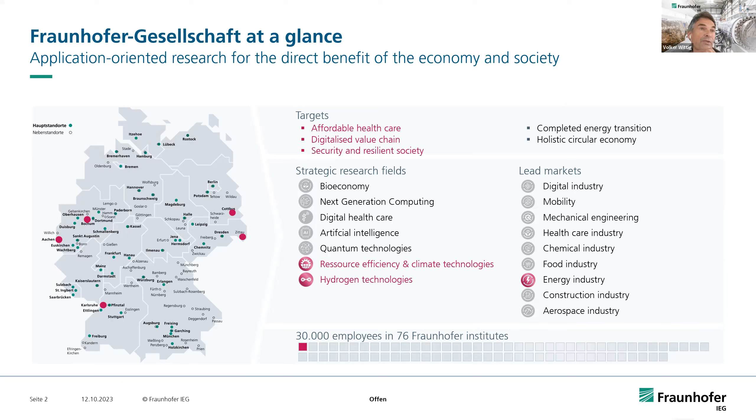We were founded here in Bochum, in this institute, 3 years ago, changing over from the Geothermal Center into Fraunhofer IEG, as it's called. This is our institute now. We are well over 200 employees already, with 2 directors, and very much present in the west here in the Bochum-Aachen area, also in the east, Zittau and Cottbus area connected to the Hochschule Brandenburg. We are also now setting up a center in the south in Holzkirchen, especially for application in southern Germany in the Molasse Basin.

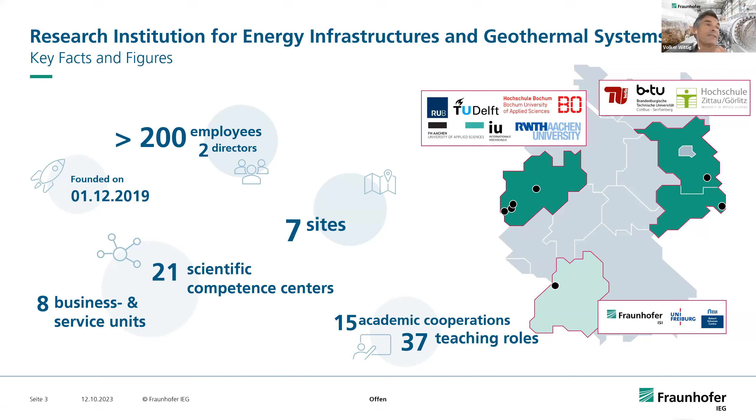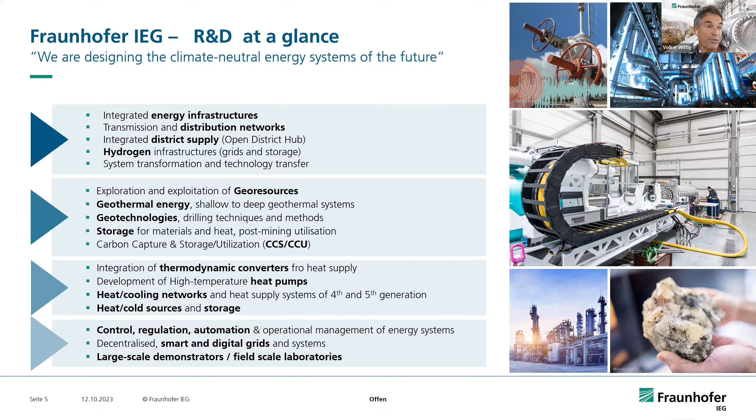A little bit more of a look inside our Fraunhofer area now. This is what we do within Fraunhofer IEG, the Institution for Energy Infrastructures and Geothermal Systems. What we did in the past was centered in this block, the Geothermal Center, working a lot on geothermal energy, geotechnologies, and geothermal resources. Now within Fraunhofer IEG, we've expanded our envelope quite a bit into hydrogen work, energy infrastructures overall, thermodynamic converters including heat pumps, heating and cooling networks, and also smart and digital grids, controlling energy, regulations, and automation. So the part that used to be the focus of our institute has become quite a bit larger, as you see in this picture of the inside part of all that. We added a lot more stuff and know-how within the institute.

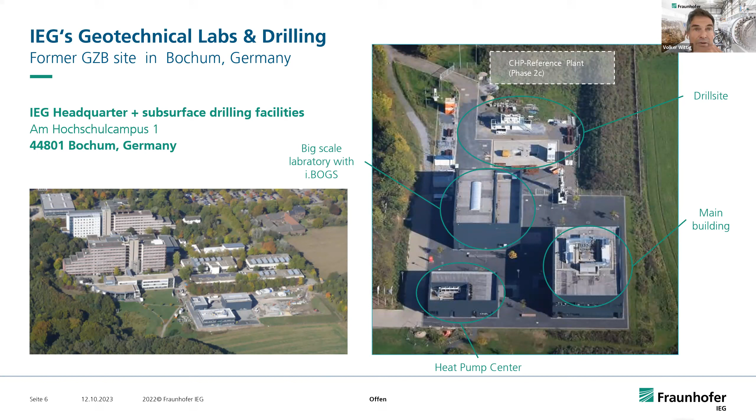And this is where we are in Bochum, our Bochum campus, which we built up about 10 years ago. We managed to set it up with our own geothermal system. Back here is our drill and test site, and this is where the headquarters for the IEG is, where I'm sitting in this building. This is very much our downhole, drilling lab and development area here in Bochum, as it was before. It remained all here.

Within our group, Advanced Drilling Technologies, we have 3 drilling groups now within Fraunhofer. One is the applied drilling group, running our rig and drilling actual holes.

And then we also have one group now that is more drilling engineering and planning for deep wells, people that have been in oil and gas before. And then my group is still very much focused on developing new drilling tools, new ways to break rock. You see here our main research points. Today we will talk very much about percussion drilling and also acoustic-based drilling control, and artificial intelligence / neural networks becoming a big one for our downhole monitoring processes that we are developing.

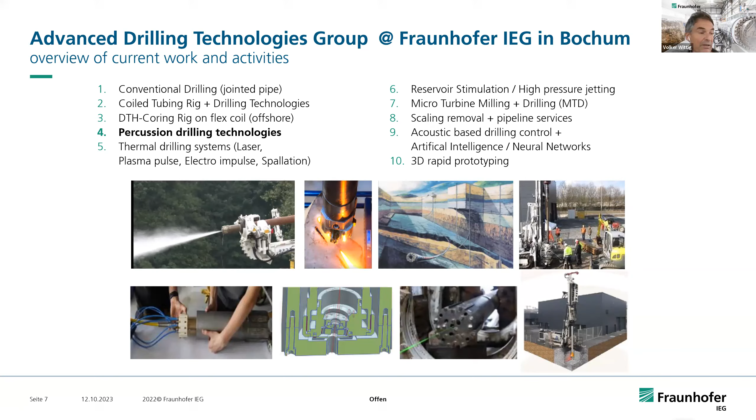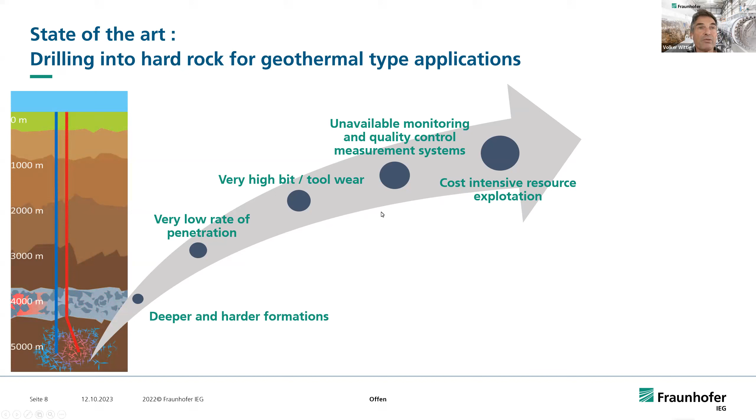So why do we need new drilling technology or look to develop it better? Most of you know it. We have still low rate of penetration, could be a lot better. We have to drill harder and deeper. Typically for geothermal, the tool wear is high, and also the monitoring systems are not that good. So it all makes for not so cheap drilling, so to speak. And this is why we still work and try to develop better fit-for-purpose drilling technology.

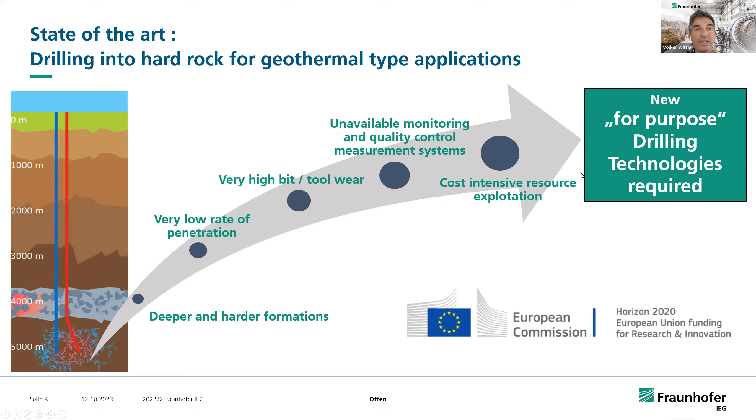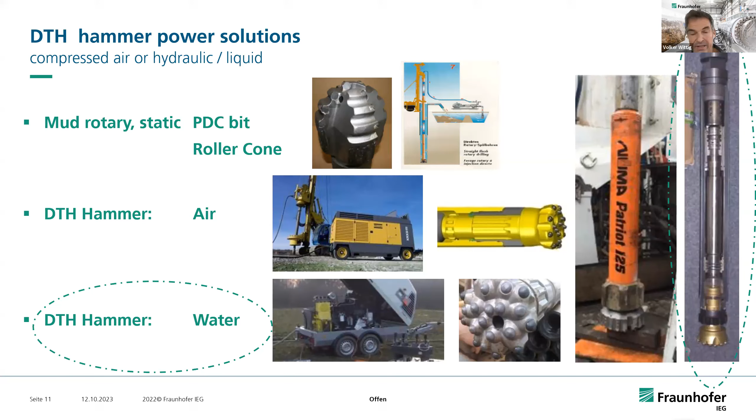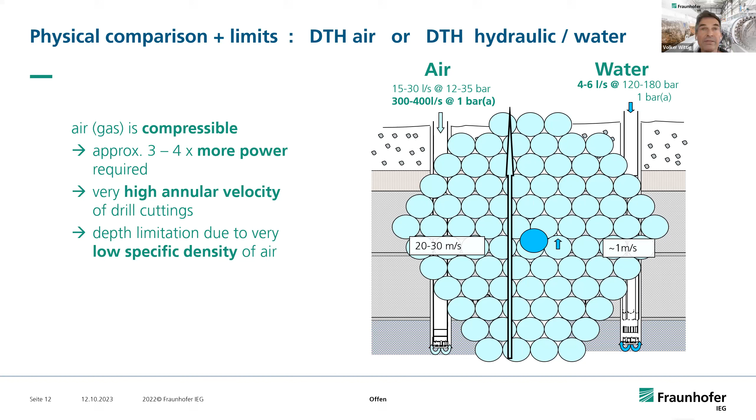That's why for deep drilling, we are after hydraulic or liquid-powered water hammers. Gas is compressible and much lighter than water or other reservoir fluids. That's why the depth capabilities are already limited for air hammers. Plus, we have very high expansion rates. And for cutting transport, we also have issues with air hammers - bringing up high speeds in the annular area, or we have problems getting the cuttings out properly. So those are all factors where air hammers are limited in where we can use them and to what depth.

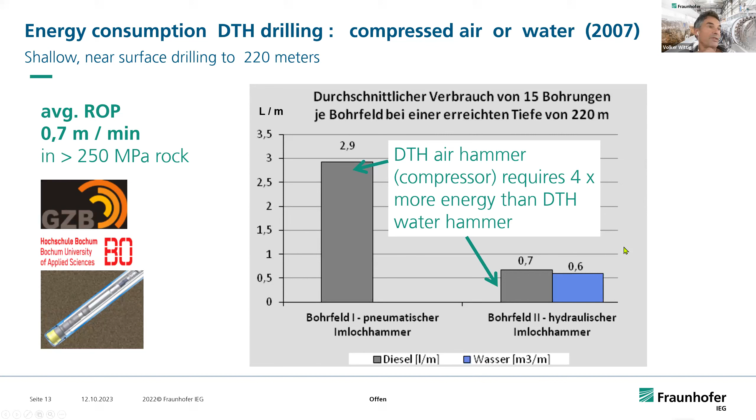That was just trying to measure out the energy and fuel consumption. This is becoming rather important now in the drilling business - how much energy do I need to drill a hole? And that's where the air hammers are not so good on that side. But on the other hand, they only need air, no extra fluids. If you have air available, it's good - it may become a problem otherwise.

We have been drilling holes with water hammers also for, I could say, 20 years now. This is our project site in Bochum, where we drilled holes for our campus here for the geothermal power supply. We used water hammer technology because we wanted to investigate it and become more familiar with it ourselves, even though probably PDC drilling would have been quite adequate. So we drilled together with Wassara, with a Wassara 6-inch hammer, tried some recirculation out that you see here with a sedimentation unit. We had another unit attached to it to try to come up with at least a system where we could recirculate some of the water to make drilling possible for deeper projects.

Still again, hammer drilling was quite good because we came up with high ROPs, up to 1 meter a minute in that type of sedimentary rock we have here. So that was quite good, and that was another first step in the direction of water fluid hammer drilling.

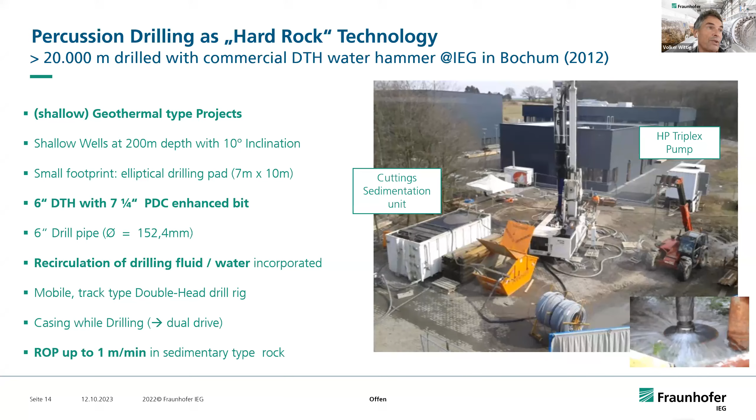So it was quite fast and good drilling, and Hanjin also tried some recirculation and some better cutting lift systems using compressed air within that system.

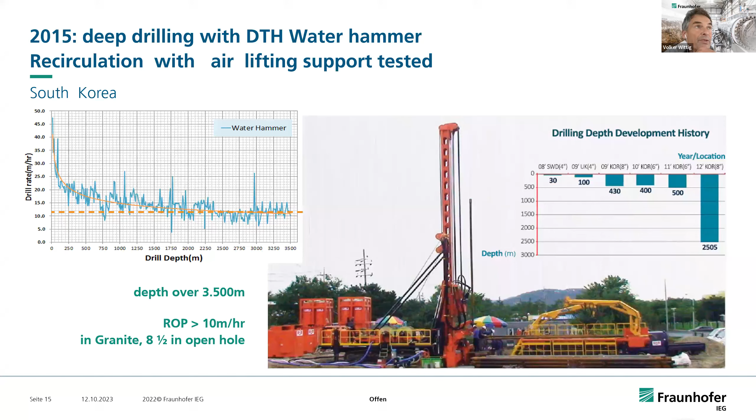Then another few years down the road, we were in Finland with ST1, and the company Anger drilled a deep hole there for ST1 for geothermal use. The first top section down to roughly 4.5 kilometers was drilled with air hammers, just using air and some foam probably at times. And it worked quite well, amazingly well.

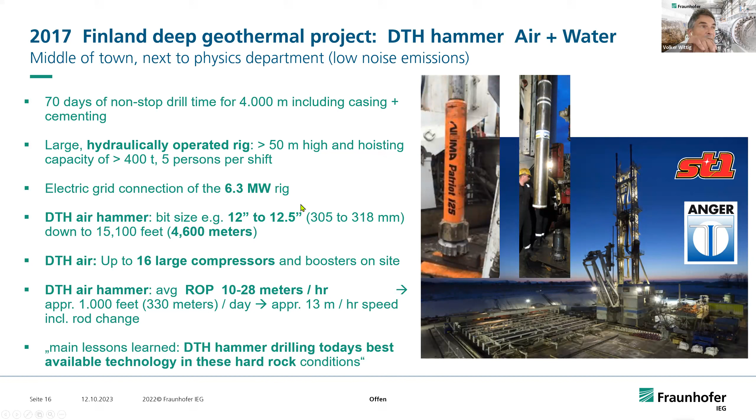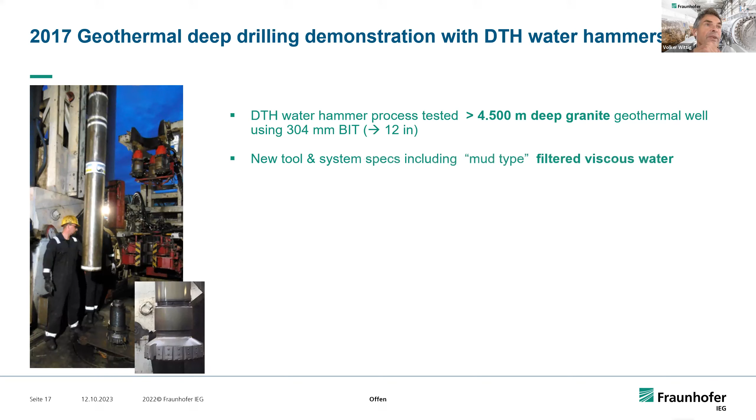Then the program was planning on continuing with fluid hammers, because hydraulic hammers are not that depth dependent. They can be used to about any depth. So within the same project, some prototype percussion hammers were tried out to be run beyond 4.5 kilometer depth. And as mud type fluids, viscous water was used. So not just clean water, but some light viscous water to help for cutting transport.

The hammers that were used, they had a few different kinds. One was from Australia, percussion system. I just worked with their existing rig and pump system. That was good. And an already positive outcome was that you feel like you're in a much safer environment, less stressful, less air, less dangers from compressed gases, lower air consumption overall.

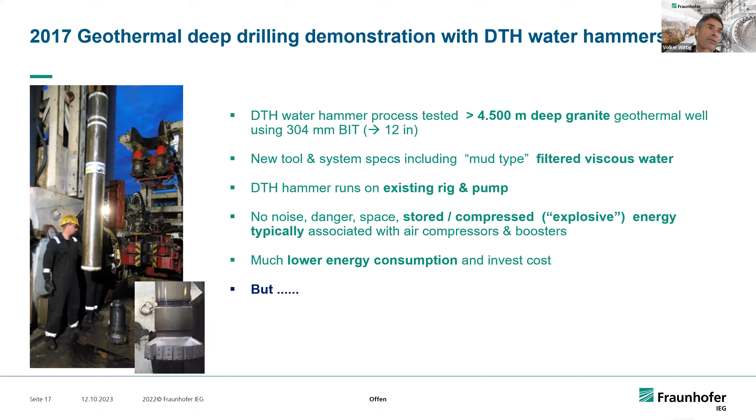So this was all good factors, and definitely proved again how well the percussion and fluid percussion system work. But one other problem with hydraulic hammers is actually the controllability, and to run them at the perfect parameters downhole at greater depth.

Here you see a chart from drilling in those wells up north, and you see fluctuation - here's the bit going down, gradually working its way down. Then you see a chart of the flow rate, pump flow rate, and the pressure in the pump, and you see how irregular it is here in sections. This is a timestamp, about 1 hour in this neighborhood. And this is one of the biggest problems they experienced up there: how to really run these downhole water or fluid hammers to get just the working point right.

And that is one more issue to be addressed with these hammers once you have some that work really good: to also make sure you have a means to run them at the proper weight on bit and speed, to make sure they function right and give you their best efficiency.

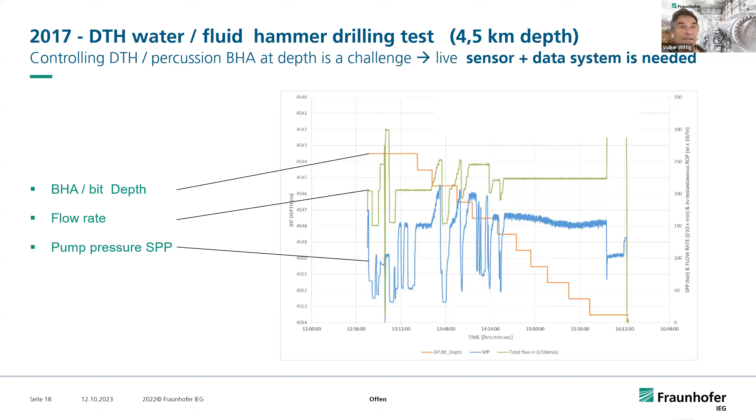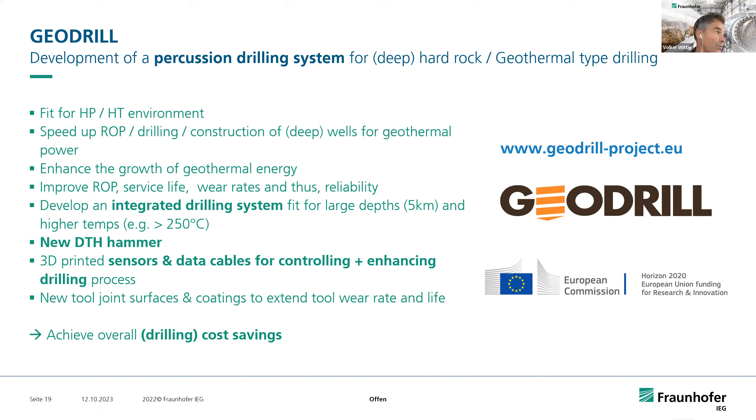This is what we addressed in our GEODRILL research project, an EU project with some other partners, where it was about setting up this new percussion-based drilling system - us building a new hammer section, and also coming up with sensors and data cables to be connected to the percussion section in order to make sure we have good control over the system, to have a good and efficient percussion-based tool for drilling with low wear, low tear, and high drilling output.

So we set out to completely rebuild a percussion system to make it fit and more useful for use of drill mud and not only clean water, because that was the main issue typically left with fluid-driven hydraulic hammers. Then you have two options actually with those systems.

You can build a flow-through system, where all the drill mud and drilling fluid is pumped through the tool itself, and as it flows through, it activates the percussion section and gives you the dynamic forces that you need for drilling.

Or the other possibility is to have an external closed loop system, which can be more plug and play, where your mud flow powers like a downhole generator or PDM motor, and generates extra electricity or hydraulic energy that then, in a separate circuit, powers your percussion section. And that typically comes up with a lot of energy losses and lost percussion output compared to the flow-through system.

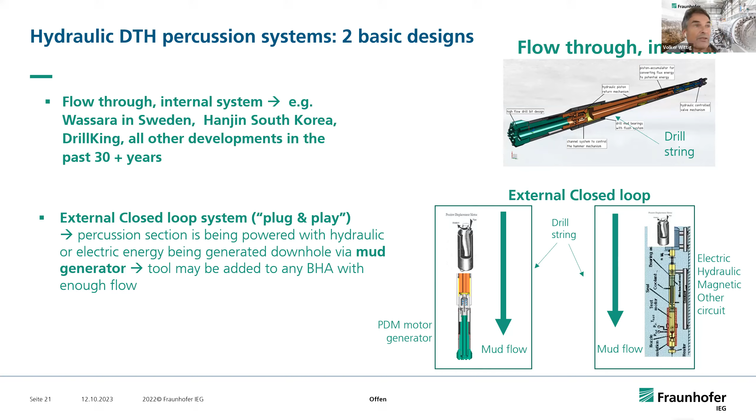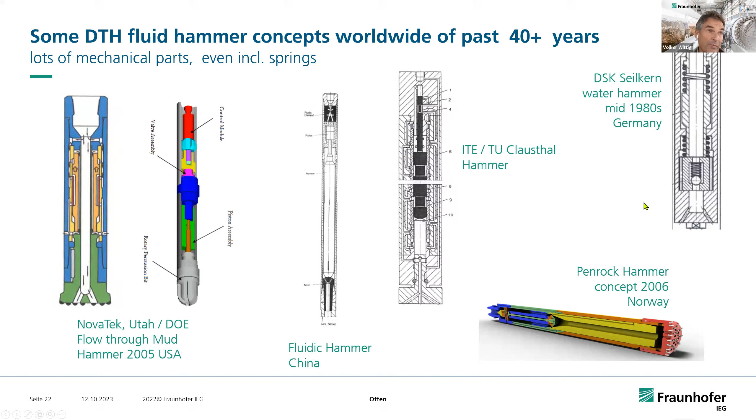And then there were some others in the past working on hammer solutions or flow-through hammer solutions, whether it be in China, in the US, or in Clausthal, Germany, starting with a continental deep drilling borehole over 30 years ago, 40 years ago, in the coal mining business. So there were a lot of activities for downhole, also fluid hammer systems. And this is maybe the most widespread tool in the industry.

It's from Wassara in Sweden. And we have drilled with this many thousand meters. And you see the basic setup here in the section view. And you also see here many inside pieces of such a percussion system that you need to make it work. And especially we looked at the inside of it and how they work and how they fail.

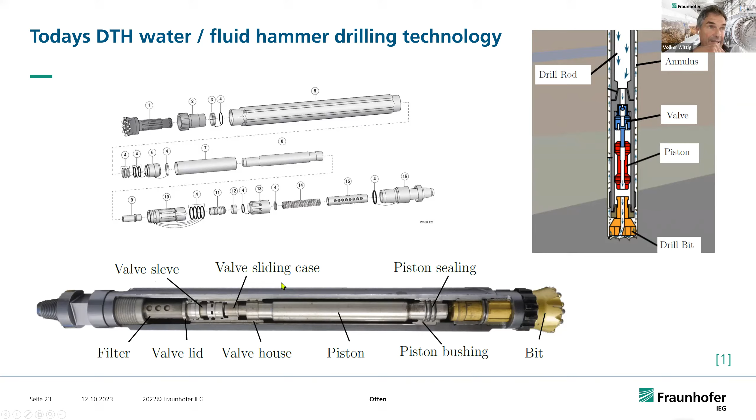And then we came up with a conclusion: well, we need the piston here. This is the piston that makes the hammer do what it needs to do, and then the piston needs to be controlled, and there's also wear and tear happening in the valve section. That's why we decided to really take a new approach on the valve section that you see depicted here. And we decided we need to get rid of it and find something better to control the piston.

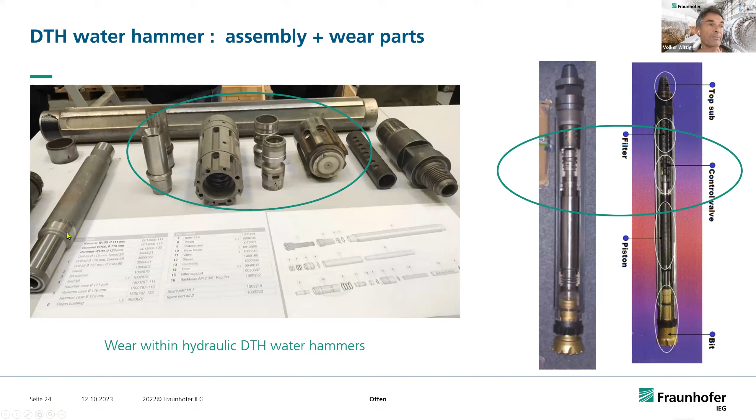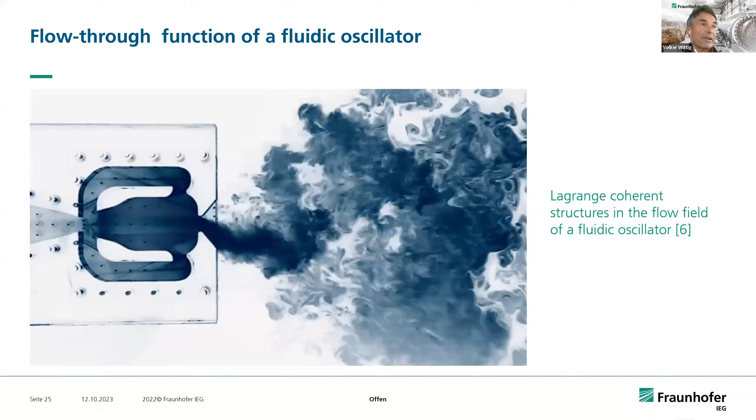It's still an axial percussion engine that we have, the piston actually moving up and down, so that's something we need, but we can find a better way to actually power it, run it. So we looked around in physics, and then we decided we go back to the Coandă effect that you see here, that actually gives us the possibility to use a fluid pushed along the surface at certain speeds to give us a way to control its path, or act much like a fluidic switch on and off.

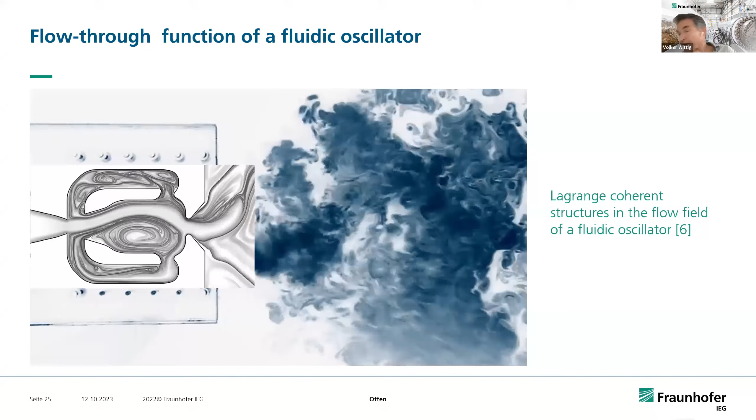And that's what we then further followed and built a switch out of it, like here. So these are the basic hydraulic switches, Coandă-based switches that you see. The fluid is being pumped here into this channel, and then it goes either right or left, and it does that depending on how you set this whole system up. So you have only one part left, and that is moving in the hammer.

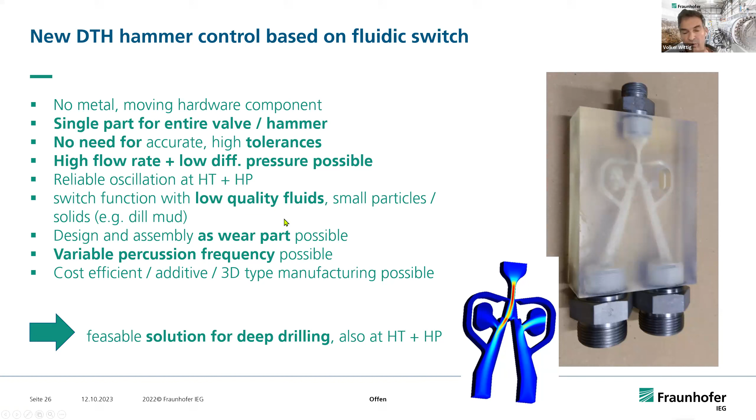And we were then looking for high flow rate for our hammer, because we need a high flow rate and don't need a high differential pressure, so we want to have as little pressure loss as possible, and all the fluid we can have, because for fast drilling we generate a lot of cuttings that then need to be lifted up at the same time. And typically, for example, with standard hammers, the flow rates were too low at full drilling speeds to really get the cuttings out adequately. And also we are looking into variable frequency setups to have a new good solution for a downhole percussion drilling system.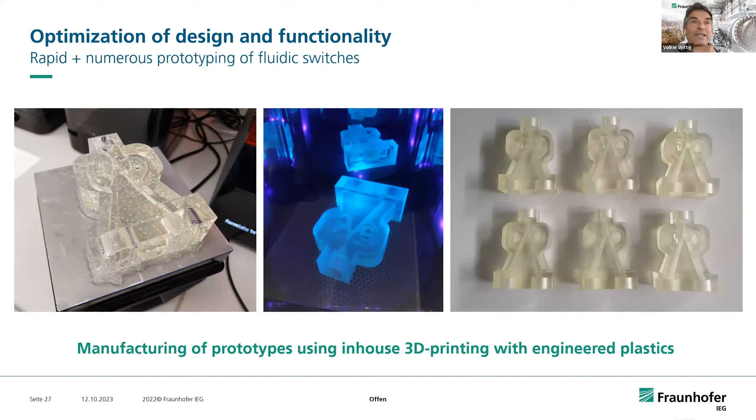And so we set off and started working with switches and setting up what we thought we need. We first set up a 4-inch percussion system and looked into the feasibility, and this just gives you a little bit of an impression of how much work we did. Like all these switches here, they are all very different, not in how they work, but actually the outcome, what they do as far as switching power and switching parameters. But just looking at them from here, you wouldn't notice any difference. That gives you also an idea how tedious it is to set up a good system with this.

One big thing is the inside of the switch is really the center focus part, because it's the surface area where the fluid dynamics and really the salt of the soup is, so to speak. And then surface quality is one issue, but also how to shape the surfaces, and that's what we worked on and got quite some good results that we then ended up making into real metal parts that you see here, and still being worried about the surface area.

And the first thing you see already here is that you don't see anything compared to before, and so we always had to make things visible after making the switches with CT scanning to see what we had inside, to verify the tool came out, and then we set it up again to measure it after running a few times to look at possible wear and tear.

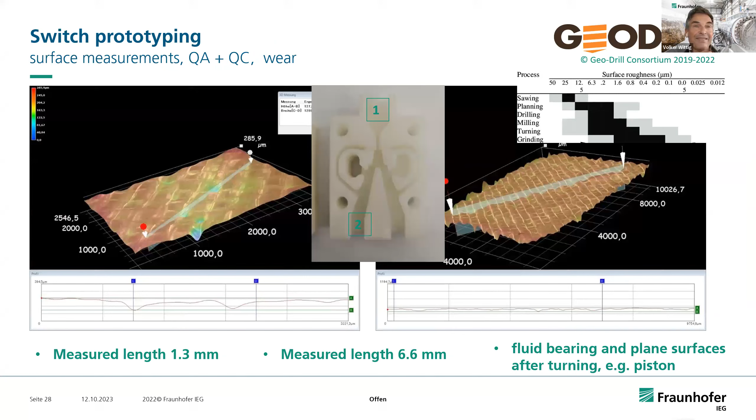So these were basically these three slides here. You see some of the major developments that have happened. One doesn't really see so much, but believe me, there was just a lot of work and development involved. And then we set up here our own percussion system. Like you see here, it all happened at low pressure areas, initially just using plastics, using very rapid prototyping to come up with a system that works well.

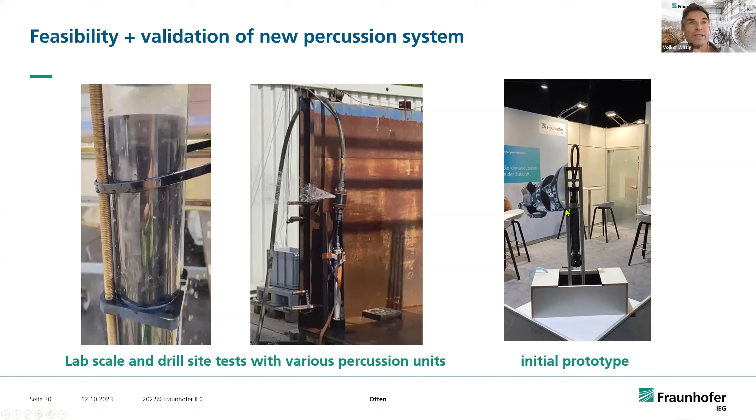Because one thing is having a switch that works, and the other thing is connecting. And once you did that, it's down here, that this ensemble works together in a way to... fluid that exits the whole system. This is typically what you then feed out the exit of your drill bit and goes back through the annulus and up the hole. This is one prototype that was, I think, last year at the GeoTHERM in Offenburg.

So that was what's inside of our new percussion system, and then the other part was, of course, to have a kind of forecast of what will happen when you pump anything else than water through it, especially dirty water, mud, drill mud, or even solids within the drill mud. So we started right away with solids. We just did rough experiments, or actually a few of them here on our test bench, looking into the Wassara part. So we used the Wassara hammer setup just to see what happens.

So we've seen it already many times, what happens when you pump dirty water through it. And then this is our basic percussion system as it is set up now, just with a moving piston inside a barrel and very simple parts that are being used to generate the percussion. And then the Wassara doesn't like solids, you know, we know it, and it pretty much stalls quite fast when you try this.

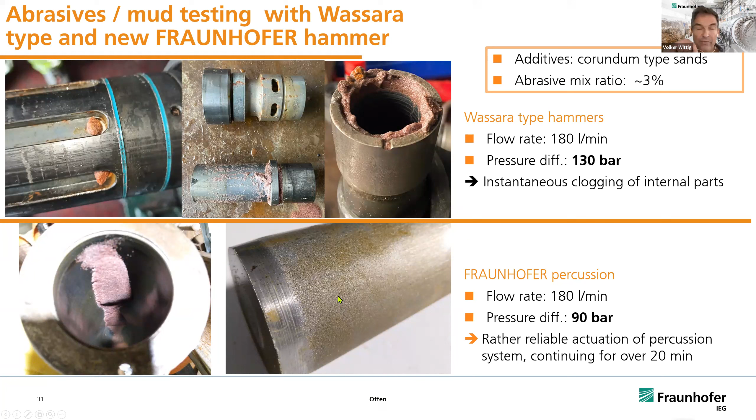And then our percussion unit, which doesn't need such tight gaps, it's built in a very different way, continued to run for quite a while despite having sand and solids in the fluid. So it was a very good system. And we were also very well surprised, but it's exactly what we are after. And then in our field drilling test it was also visible that using some bentonite type drill mud was no problem to run the tool for drilling.

So down the road, we then assembled the whole hammer system in the same geometric size as other hammers. So it's a plug-and-play system to be attached to other drill strings. You see the housing here, it's a hammer housing from Drill King or Wassara, from the company. And then we replaced this inside part, this complicated cross section, with this switch section that is not moving. It's a solid part. And then here is the hammer section, the piston, which is actually working in this anvil hammer housing.

And here we actually have inserted a box that is capable of being like a fast changing chamber. So we can actually insert different switches depending on what a customer may want, as far as rock type or bit type that somebody may use with a hammer, as far as frequency range goes, or as far as mud type regarding the viscosity of the fluid.

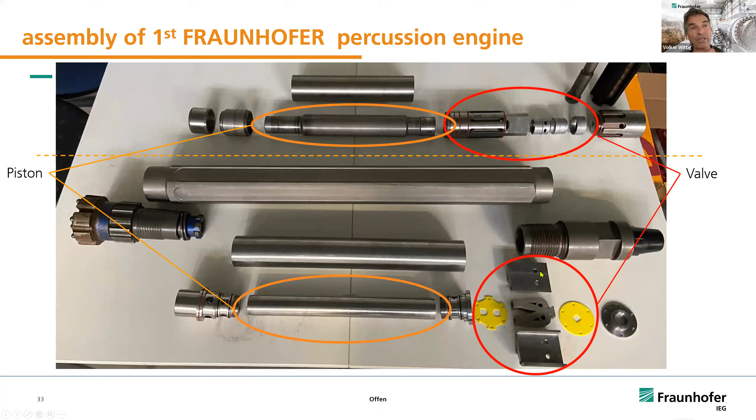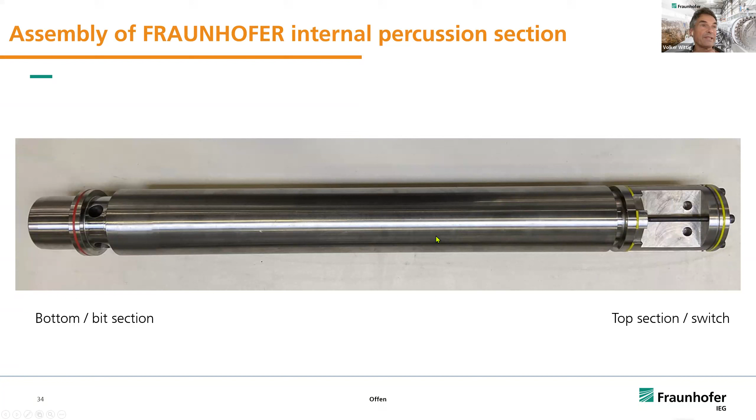So that's an idea to be actually in a position to give the hammer a special fine tuning to where it is to be used down the road. And also having the possibility of a fast changing system for wear part items. And this is the hammer section all set up together. So how it will be inside the housing, then working up here, the switch system, where the control unit sits, and then the piston actually sits inside this section.

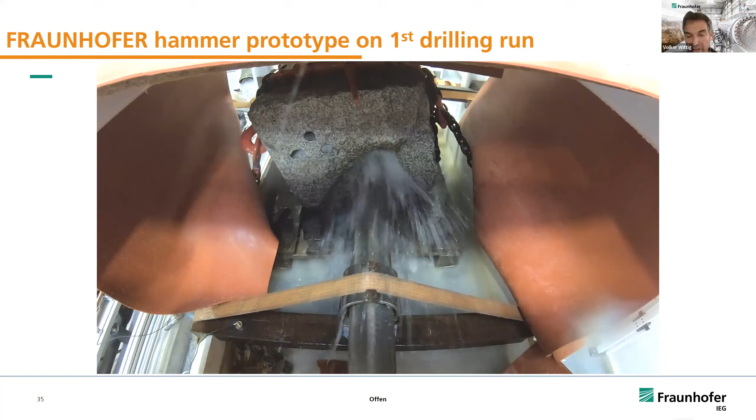And this is the view of one of our many tests. This is the new percussion unit with the switch in there. And we actually had here only a mock-up drill bit. We were just not interested in drilling fast. We were just interested in runtime, frequency, and matching our piston stroke and frequency to get it in a certain range that we wanted. And also whether the hammer tool can run without weight on bit and with weight on bit.

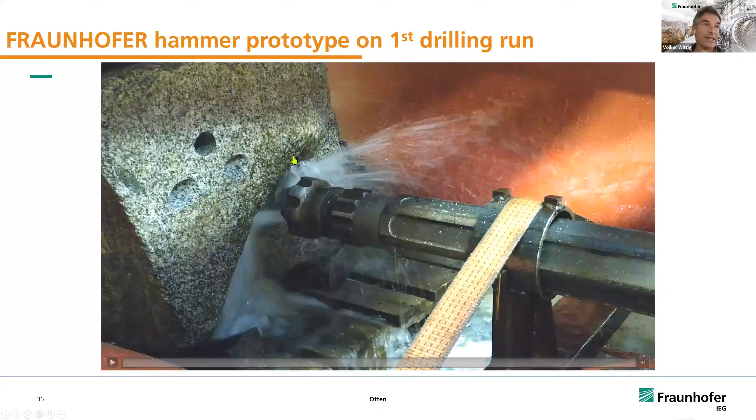Typically, the other hammers are set up so that they shut off when you pull off bottom, which is also a good idea, but for very soft formation, sometimes that's not such a good idea. So we can also run the hammer section without weight on bit. So we also have the options there.

Looking at the result of what we get from the percussion unit as it is set up now, these two important charts: frequency chart, frequency over flow rate, and then the pressure drop, the flow rate over the pressure drop.

So one important thing is having a certain flow rate that we need here, in the 200 to 300 liter range for a 4-inch hammer, which is at least what you want. This is out of our early prototype setup, coming up with a frequency range of 20 to 35 hertz, which is at that time what we were looking at, and it worked quite well for us.

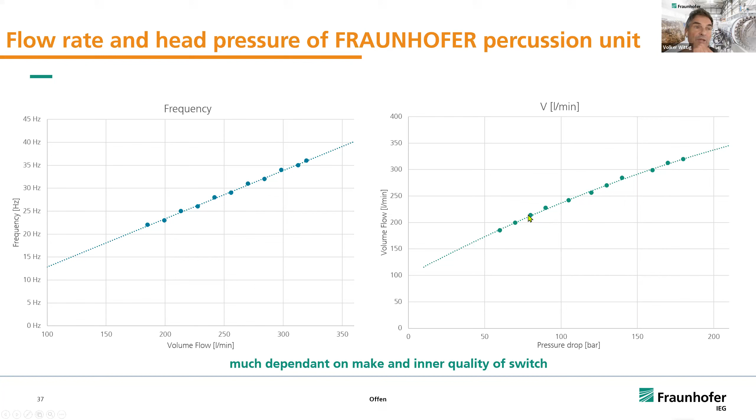The same thing with the pressure drop being still quite high for us. I don't really like to be that high, but we at least noticed that we have a very influential parameter that is controlling our pressure drop, and that's really the switch quality inside of our tool, depending on how well the switch is made, or it even becomes better as it is wearing a little bit, because it will be cleaning itself more and more. And then we noticed that the pressure drop also goes down over time, quite a bit, it can go down significantly. The switch wears down, gets cleaner inside.

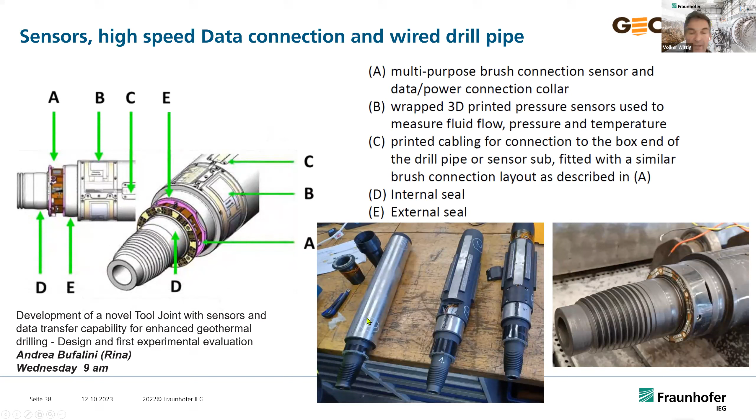The second part of the system, which I mentioned earlier, was a sensor and control part. Here you see the results of the other partners in our GeoDrill project, setting up a data connection system, a mechanical contact-based connection from one side of the drill string to the other through the tool joint. Here in the drawing, and here in the real made-up first initial prototype tool joint with a brush system, and these were sensors that were embedded into the sensor sub to pick up vibrations and other sensors, depending on which one we put downhole, to tell us something about the performance of the tool.

And this was all tested early in the year on our drill site for drilling performance and investigation. The drill string part that you see is just in a very early prototype stage, something we really don't want to take to the field yet, but as far as being able to hold up to percussion and make and break, it performed really very well. This is just assembly of the hammer section here. This downhole hammer section, we had stabilizers that were also equipped with sensors, and then the data-ready drill pipe was up here for the full field test.

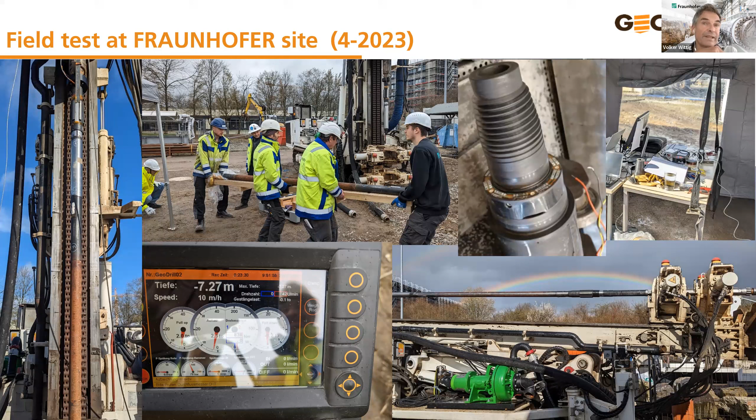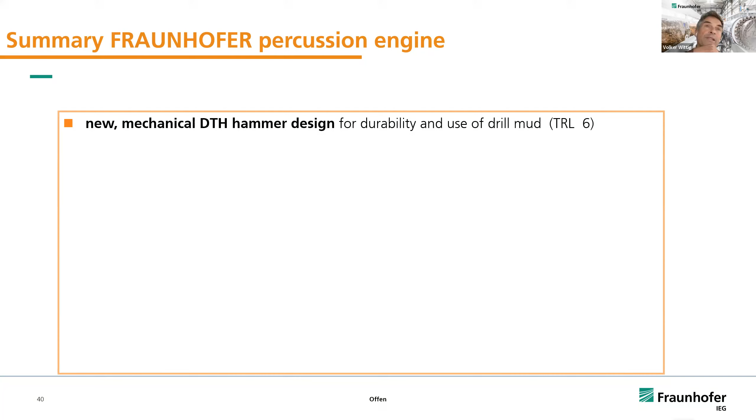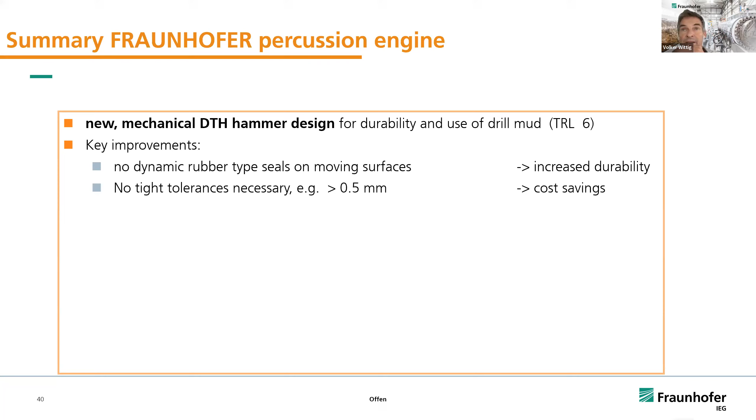So coming back to the percussion system that we built, we set up a new mechanical-based hammer design for more durability and use of drill mud. We especially were keen on avoiding rubber seals, so we don't have this seal surface interaction, which always had problems in these tools and led to downtime. So we try to leave that out. We increased tolerances. We are not really needing these tight, exact machine tolerances anymore that are very expensive and also typically lead to high wear and low stand-up times.

Then simplify the mechanism, reduction of parts. We were drastically able to reduce the parts in the hammer, and we can even optimize the mechanism in terms of frequency and impact, piston control with a hydraulic switch. The initial system we set up was for 4-inch drilling. So this is the first setup, and the tested frequency that we ended up with was around 36 hertz at 320 liters, and the differential pressure is still high. It's at the high end of things, so we expect it to be dropping down maybe close to 100 bars for these types of hammers, but definitely probably not lower than 100 bar.

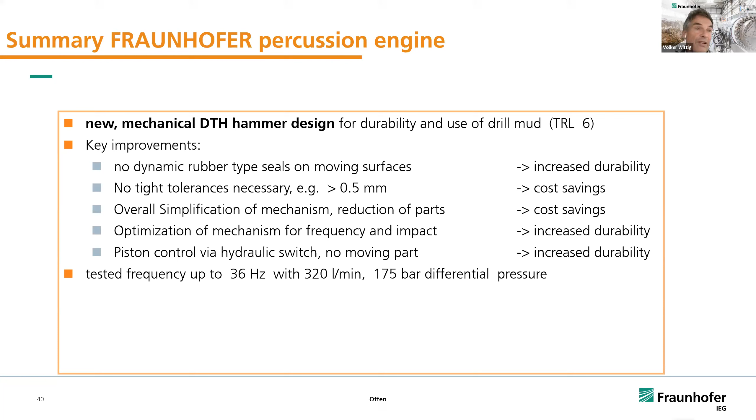It was typically then for 5.5-inch drilling. We are also looking at some possible coiled tubing applications with these kinds of tools down the road for exploration drilling and fast mining applications, especially with flex-type coils, and also possibly medium-deep geothermal drilling installations. And a fit-for-purpose development tool would be the next step for us, and that's something we are currently in the process of doing. And also being able to set up the percussion engine, the hammer, relative to the application, as I said earlier, the geology and drilling through it; those factors can be implemented to set up a percussion tool like that.

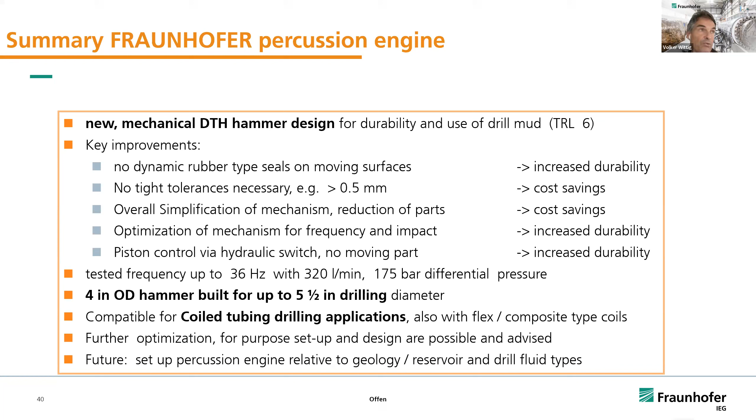So overall, those were the things I wanted to share with you and present to you today on developments of downhole percussion drilling, focusing on our new downhole system.